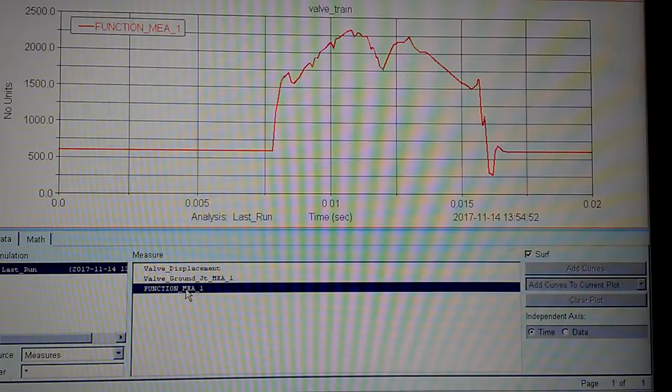Okay, so let's take a few steps back from this beautiful graph. Oh, is that not the most beautiful graph you ever saw? It's beautiful to me, and I'm going to tell you why in a second here. Let's go back to our simulation. I was having some issues. I was getting a little bit too crazy with some of the spring settings.

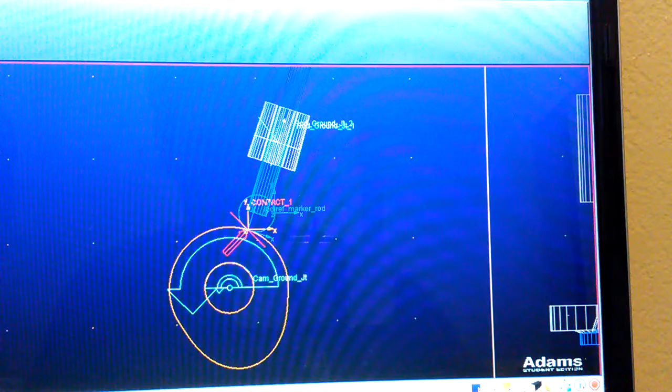Our spring friend is over here, so you can see when I click on that guy. So I was getting a little too crazy with the spring settings, kind of throwing stuff out of alignment. Not literally out of alignment, but throwing things out of dynamic equilibrium, if you will. Preload, damping, and the K value, the stiffness. I was going about it kind of all wrong. I guess that's part of the purpose of this project.

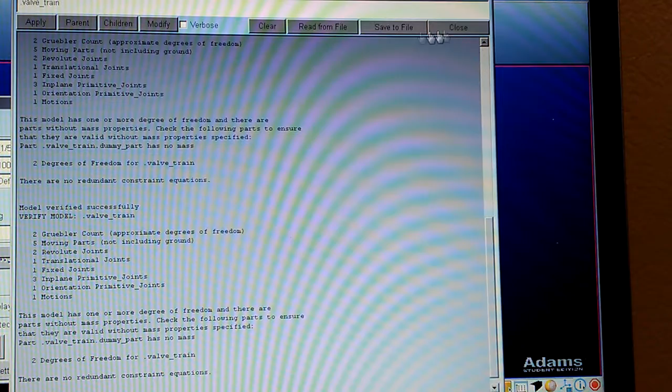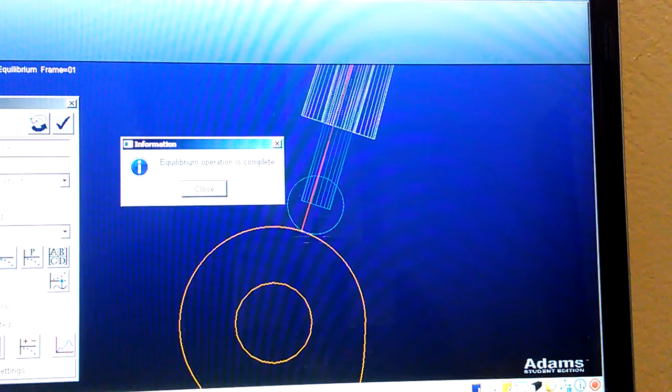But at any rate, let's back up here, find our equilibrium, do a quick check on the model. What do they call that? Verify the model. And let's play this again. And let's go back to our simulation. We'll clear this just to prove that it's a new plot. And, oh no! Okay, I think it's because I didn't start from equilibrium. This thing is so weird, every time you redo a simulation you have to start back at equilibrium. But anyways, let's try this again. There we go.

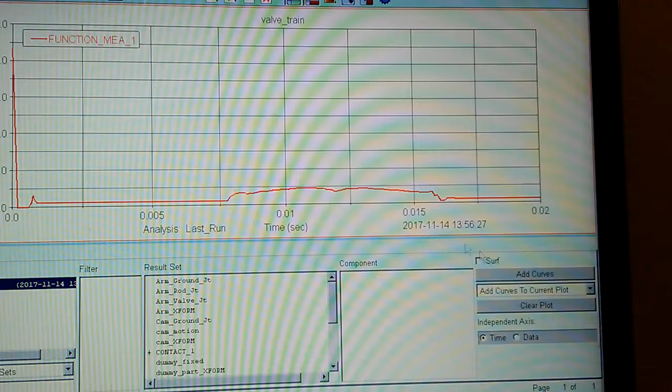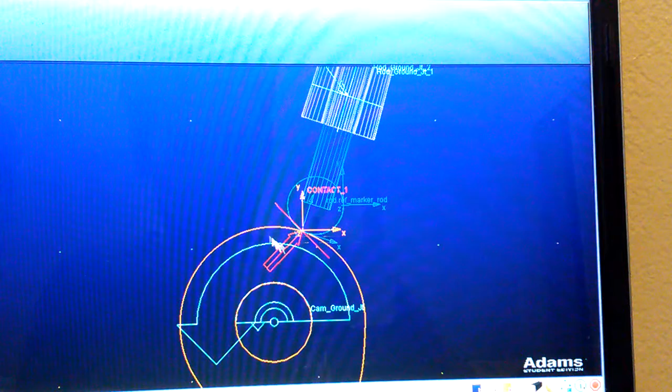Okay. I don't like that plot. Let's try this plot. There we go. Now, why is this a beautiful plot? I'm going to explain that real quick, kind of like I did in my 6.9 video, but the whole purpose of this specific part of the project is to reduce liftoff between this cam and this guide that hits the rod, that connects to the rocker, that connects to the valve, and lets air in or out of the engine, for example.

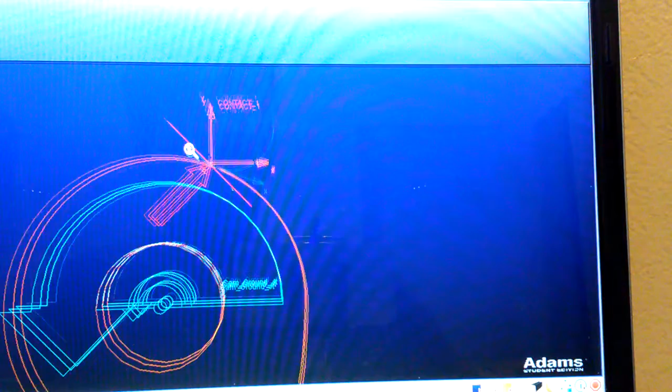The whole goal is to prevent liftoff. We don't want liftoff because we do not want our little friend, the cam here, or this guy, to smash into each other. It puts a lot of shock on the rest of the valve train. It wears the cam. It leaves little pieces of metal in your engine that get circulated around the engine until they get to the filter. You know, the filter is great, but that's only for the oil that gets carried there. There's plenty of other little bits of metal that get ground up in other places.

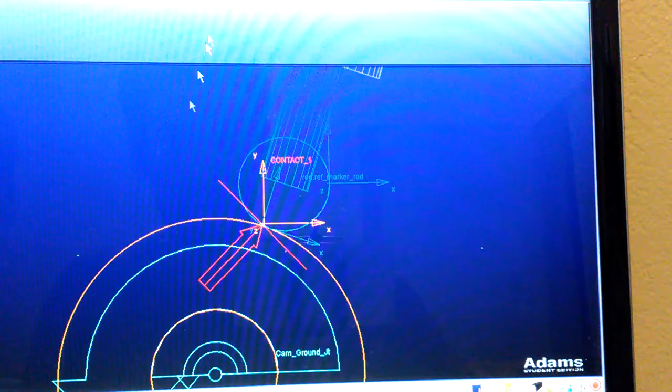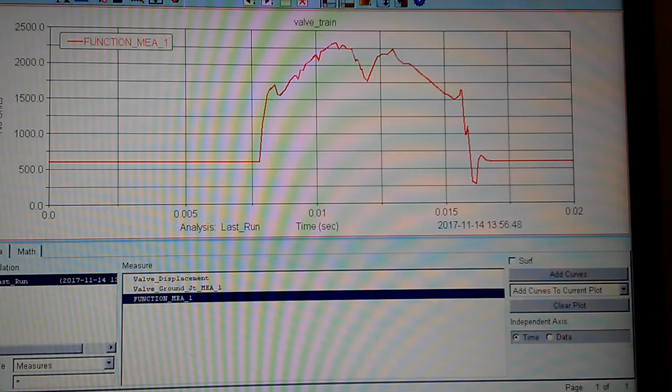So I'm going to put this down before I forget as, let's call this figure 6.11a. Let's go ahead and save this in my favorite editing program. We're going to save this as a JPEG, and we're going to call it part 6.9 figure 6.11a force contact cam arm. That's an awful name, I know, but trust me, when you have dozens and dozens of pictures, the more you label stuff, the better you do.

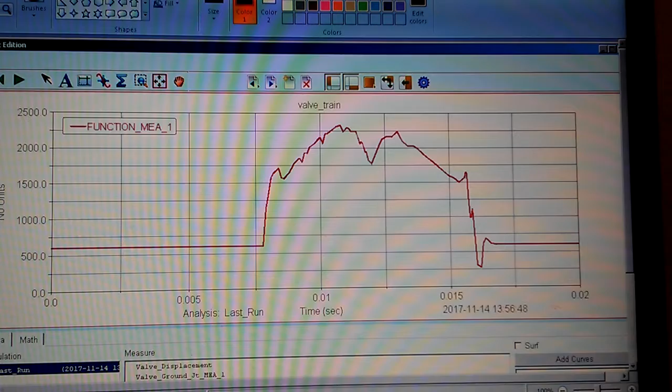So let's get out of here. Let's go ahead and save this, as I'm always saving so many new types of files, because I'm always worried stuff's gonna get messed up. So we're gonna save this as V006.9. Yeah, actually I'm going to call it 6.9 V101. 101, there we go. Part 6.9.

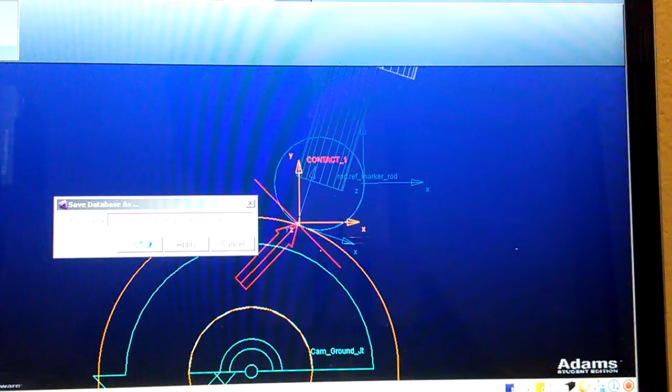So there you have it, folks. A quick little demonstration of some work that I'm doing in trying to prevent liftoff in this valve. The next part of the project, I'm going to edit the spring characteristics back to their original preload and damping and only adjust the stiffness.